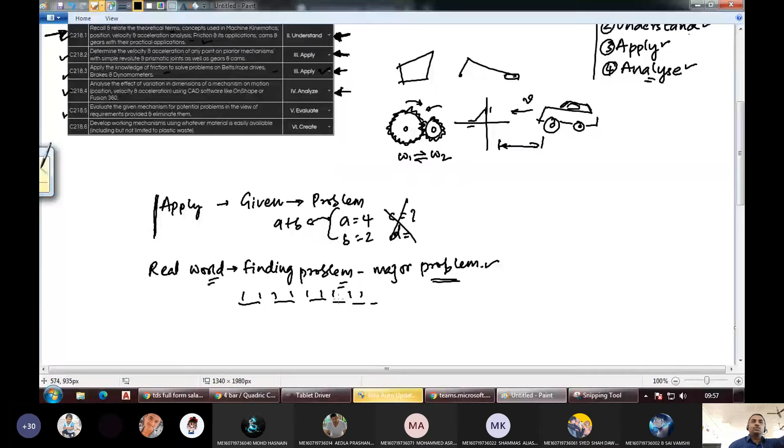So this is what is happening here. It's not just about solving a problem or remembering something. You have to analyze what is happening if we vary the length by certain value. So all these things you have to do in this fourth outcome, and that's why it is at the analyze level.

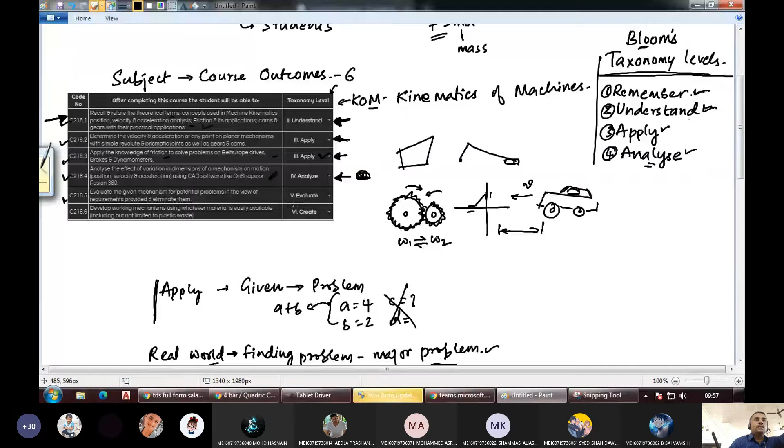Then the fifth outcome, you can see it's still higher, that is evaluate. This is the fifth outcome. So we have to evaluate the given mechanism for potential problems in view of requirements provided and eliminate them.

So let me say there is this problem of a 4-bar mechanism. Okay, so I want the wiper. Let me change the color, I'll take red color.

So let us say that I want the wiper to move from horizontal position here to the vertical position here. So this is the angle that it has to turn. So this is our problem.

So how will you solve it? You have to change the length of this crank, you have to change the length of this connecting rod, and you can change the length of this and this.

So all these lengths you can change, and the end result should be such that the rocker should be oscillating between these two positions.

Okay, so you don't just have to apply. You should know the formulae and how to find the velocity, how to find the positions, all that you should know.

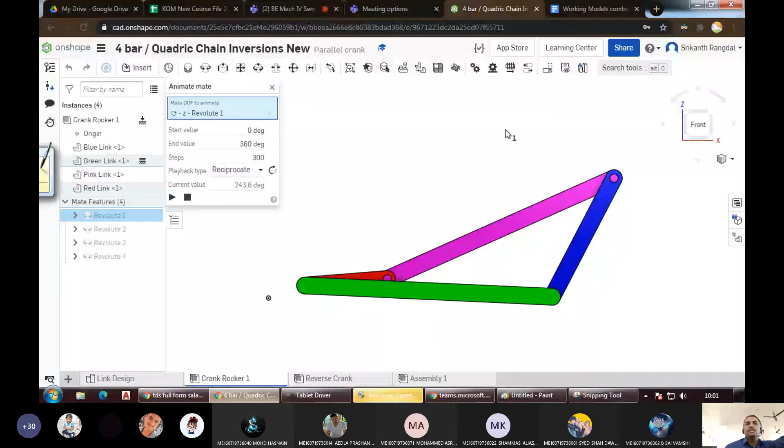And using these waste materials, we should be able to create mechanisms like this. We'll have to make holes in it, attach them in such a way that the mechanism can be obtained from it. Any doubts?

Someone was asking. Okay, so is it clear? Yes sir, so the last level here, okay.

So the sixth level, that is create. You can create only if all these skills are there with you. You should remember the formula, you should understand the formula, you should know how to apply it, you should have analyzing capability for that formula, you should be able to evaluate. Only after doing all these, only then you will be able to do creation.

A lot of us might not have thought in this particular direction. So this is a lot more systematic, isn't it?

Without following this systematic approach, also many of us are able to create some things. You must have already created, like you can do paper folding and make aeroplanes and other origami stuff. So for such simple tasks, we don't require to have full understanding of this systematic approach.

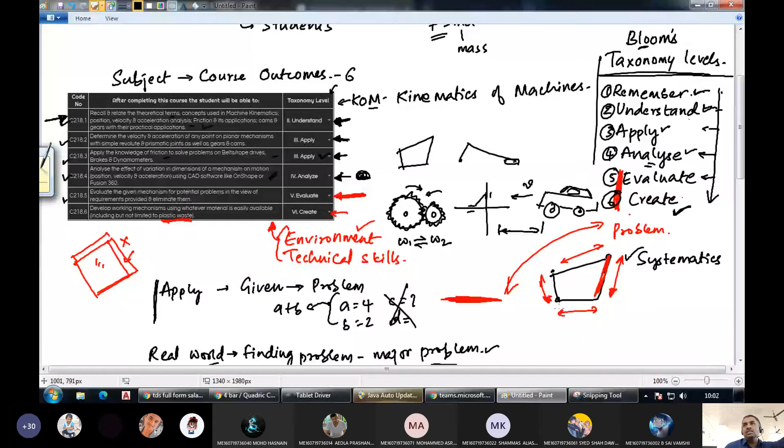But as an engineer, when you're doing the same thing, you should be able to document each and every step that we are doing. The same thing can be done by a layman and the same thing can be done by an engineer. So what is the difference between these two approaches?

A layman will do it based on his own understanding of the concept. He is not worried about whether some other person will be able to carry out the same procedure later. But the same thing when an engineer is doing, his focus should not just be on solving the problem, his focus should also be on the documentation process. Why is documentation necessary?

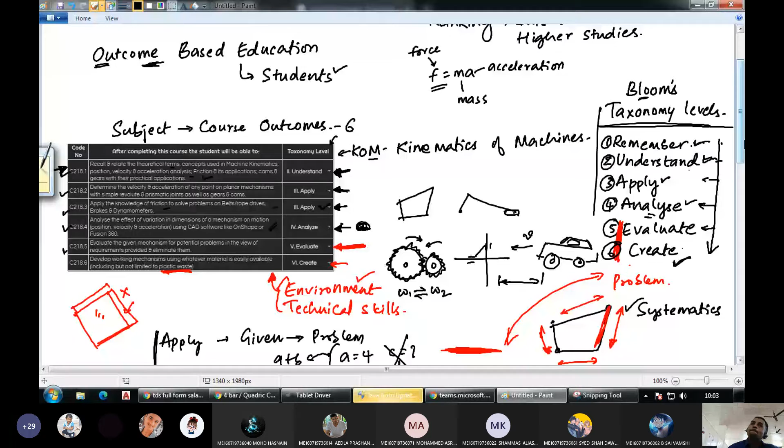Documentation is, yes ma'am? Like create the manuals for the people who will be using them. Okay, for other people who want to use that, who want to make the same stuff or mechanism, the other people should also be able to make it. And only then we can go to the industrial level and mass produce it, correct?

Yes sir, so this will not be possible from the layman. A layman will just have his own understanding, and if he tries to communicate his ideas, it becomes a major problem. He won't be able to communicate his ideas to the laborers, right? If it is a very simple component, maybe okay, he will be able to do.

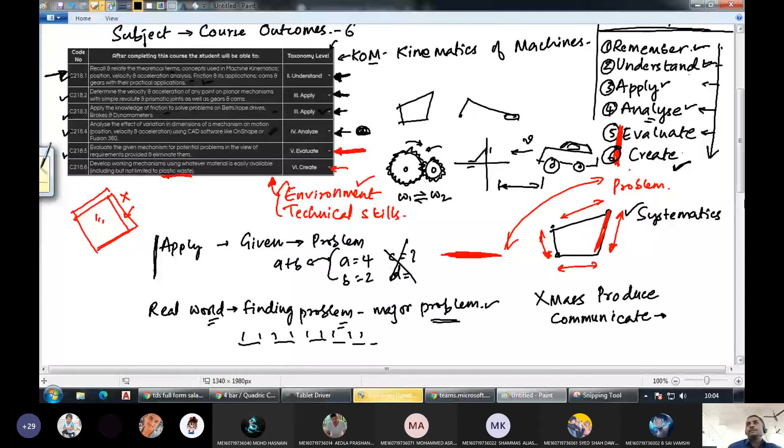But the complexity of the mechanisms goes on increasing. The more complex the mechanism, the more sophisticated it is, and the more complex type of problems it can solve, correct? And for such complex mechanisms, like if you take a simple automobile, for example.

So an automobile is made up of so many different things, right? In fact, there is no single industry which will take care of all the components of the automobile. There will be one industry which will completely focus on tires.

One industry will be completely focusing on, let us say, the suspension, windows and doors. Another will focus on the brakes. There will be another focusing on interior designing, the sofa set and what leather is used inside and other stuff. So there are different industries focusing on different stuff.

For such a complex entity, doing the documentation process becomes really very important. Because at a later stage, if you are coming across a problem and you want to rectify it, this documentation process will be very helpful. Okay, so someone was asking the question.

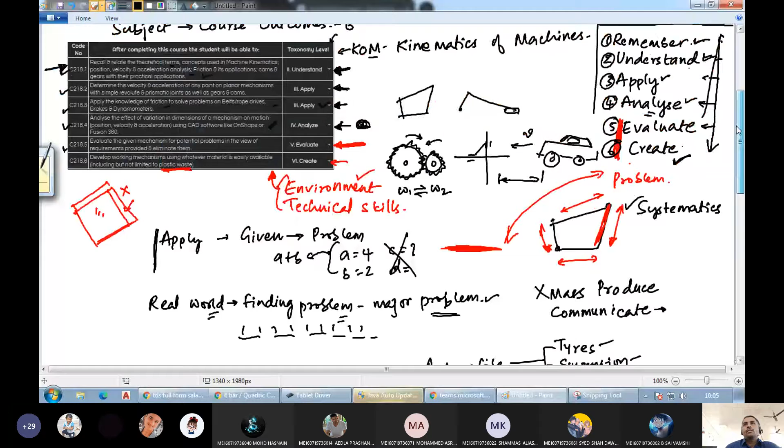Yes sir, so far we are discussing about automobile only. So is this topic limited to automobile only or anything else? No, this is kinematics of machines. Automobile is one of the machines. Because it is very complicated, that's why I brought it up.

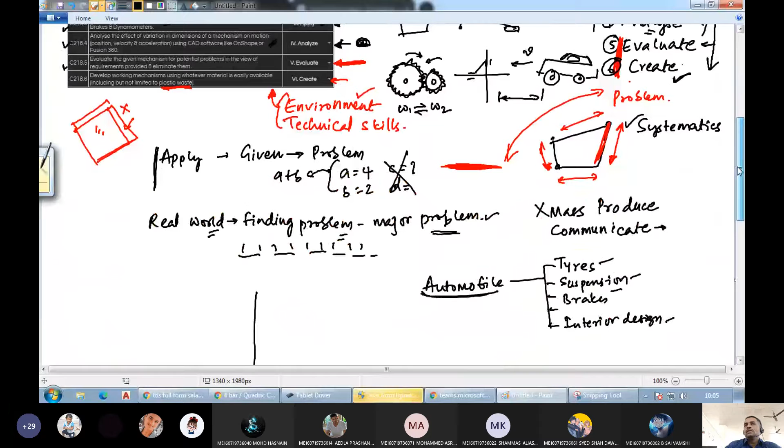So engine itself is very complicated, right? Engine has various stuff. So in this particular subject, we'll be studying about the kinematic part of the machines. What is the kinematic part? Anyone?

Dealing with kinetic energies or...? Kinetic is different and kinematics is different. Okay, let me explain what it is. So our family line, it starts with mechanics. Mechanics has two siblings, sons, let us say. So one son who is static and one daughter who is dynamic. Do you know what is the difference between statics and dynamics?

Anyone? Static means fixed position, at rest. Dynamics means moving body. Which is at rest and which is in motion?

So not just in motion, but changing the motion. If an object is moving at constant velocity,

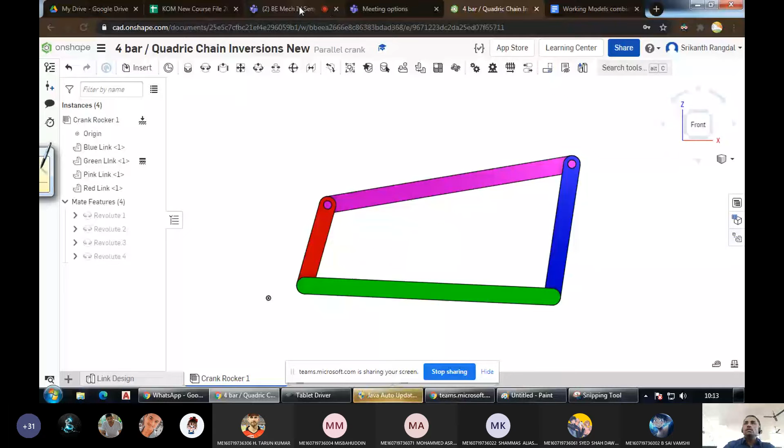So did you understand what is outcome-based education system and all? Hope there is no doubt with that.

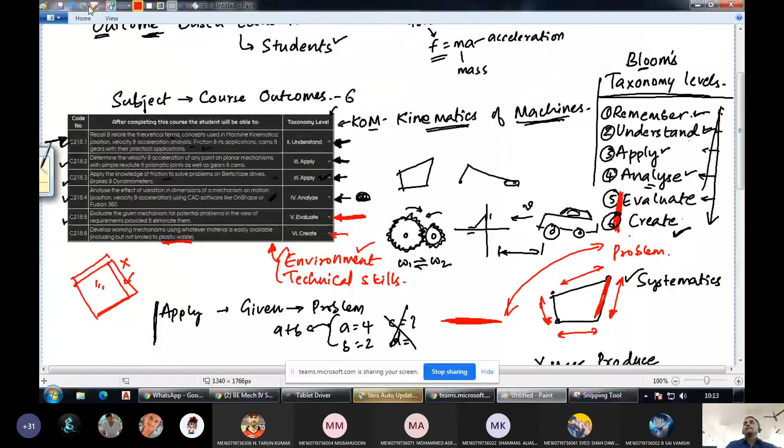Okay, so actually we can make all these outcomes at create level, but since you are doing BE, that is not required at that level. So only one CO I have kept at create level, and the remaining COs you can see below. One is understand, two are apply, one is analyze, and one evaluate. So all these skills we should be able to gain by the time we are done with this subject.

So when the NBA team visits, they may ask you what is CO number 2. If they ask CO number 2, you should be able to tell this. So at least a few students, 5 to 6 students - I think Durgesh sir must have identified some students, isn't it?

Hello, yes sir. Okay, so Durgesh sir said those few students. Yeah, so those students who were selected, handpicked by Durgesh sir.

So those students, it's my suggestion to please learn by heart these COs, at least for 1-2 days when the team visits. Of course, it doesn't matter if you remember it beyond that also. If I'm ignoring a particular CO, you can always remind me, and I'll go back and try to give you that skill anytime. But the NBA team may ask a particular CO out of this.

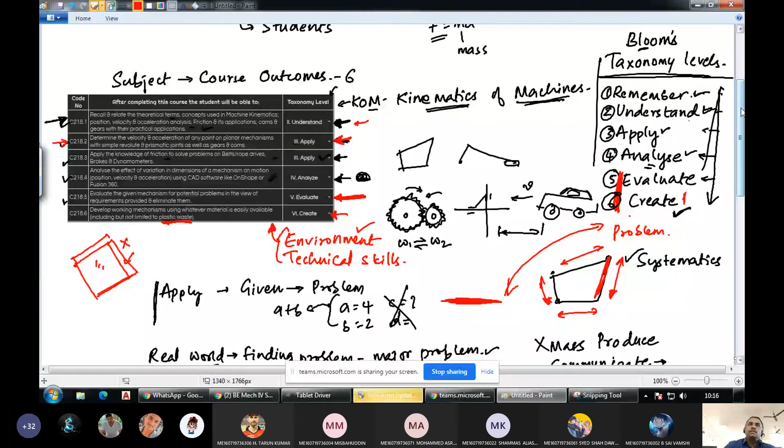And a good part of today's class I have spent explaining to you what it is and what each of these COs mean. So I hope there won't be much problem for you while explaining to them how this works, right?

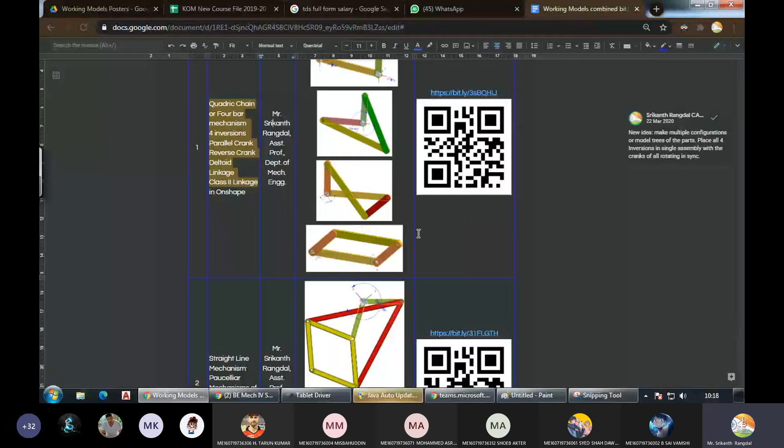And this is where you can see the links are starting. So here, this is the title, and who prepared it. There are some pictures, photos showing what is available in that file. So you can see the first file is completely on 4-bar mechanisms. So we can just go here, click on this link and open it.

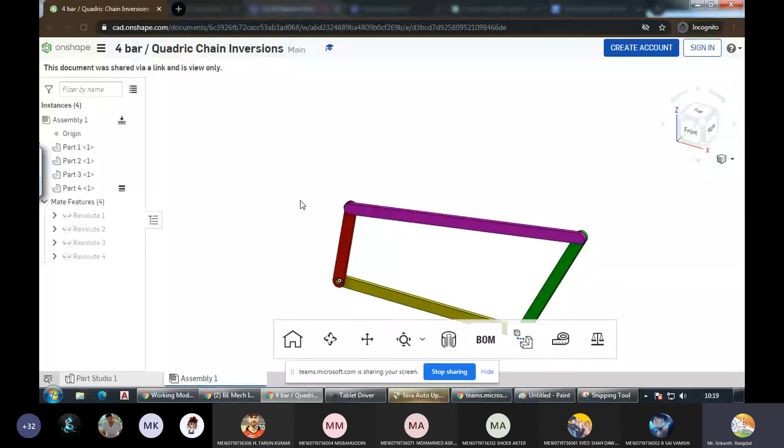Fine, so I'll just open in incognito mode because I'm signed in here. So if I'm opening in this particular window itself, instead of incognito, I will get all the options to edit. Whereas this is how it will be visible to you all, right? So you will not be able to edit much.

You will just get the option to zoom. Okay, and in assembly, if you see, you will have the option to animate it. So you just have to right click on this, click on animate, and you can click on the play button. It will start showing you the animation. Is it visible?

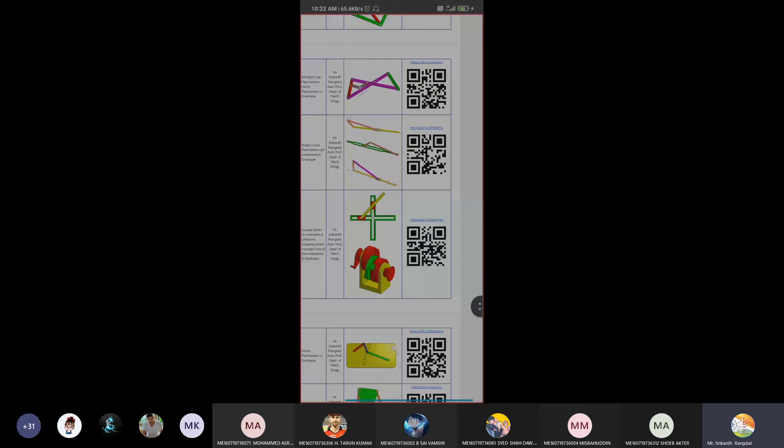So you can see I've jumped onto that place and I can start browsing the different mechanisms. A total of 9 different files are available, and in each file there are different mechanisms - not just different mechanisms, but different configurations of the same mechanisms are also present in some of these files.

So you can just go through these files. I have tried to make the subject as enjoyable as possible, because according to me, when I was studying engineering myself...

A lot of my friends used to face problems understanding how the mechanism moves, because the textbook will just give you a static image. It won't show you by animating the mechanism how it actually moves, and that made this particular subject very challenging. It used to become very difficult for my friends to imagine what motion occurs and how it occurs.

That was always some kind of regret in my mind. And when I started teaching, I didn't want my own students to face the similar problem. And that is why I've created all these models.

I hope you make the best use of these models, and I hope you will not face the difficulties which we came through in our time. So, anything else?

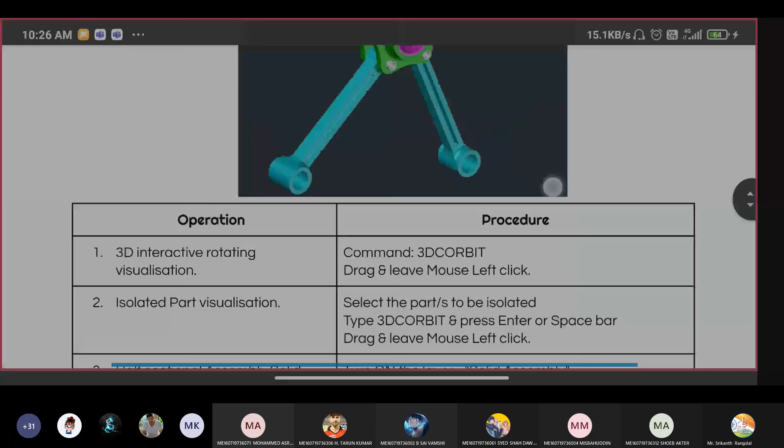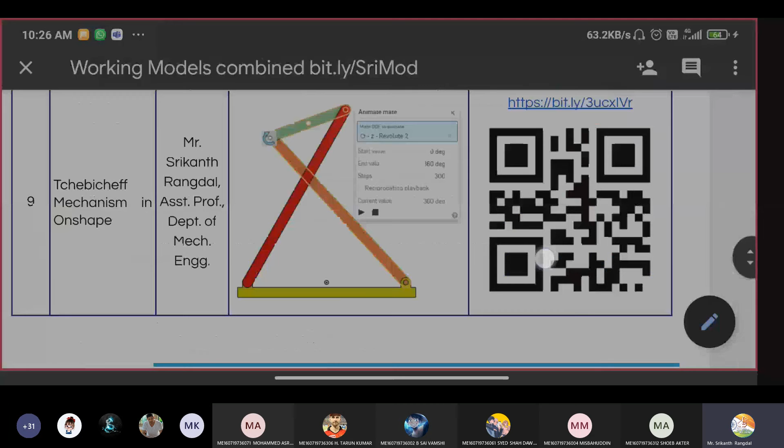Scanning the barcode with Google Lens will also work. So if you have two mobiles, you can open it on one mobile, scan it with Google Lens on another. But I don't think that is required, because just above the barcode there is this link - you can see bit.ly/ there is some code.

Isn't there any way for jumping directly to that file? Yeah, you can just tap on this link. Tap on the link, scrolling down to get to that point. Yes, you can just open that link using browser. So now it is showing me options, right? So I can open with Chrome. So choose Chrome.

What is the name for that file, sir? What do you mean, name for the file? Like this model name - model name is given on the left now. So what is that name? So which model you're opening, it depends on that, right? I want to open the model that is presented, Four bar on your screen, sir. Four bar, yeah. It is called quadric chain mechanism.

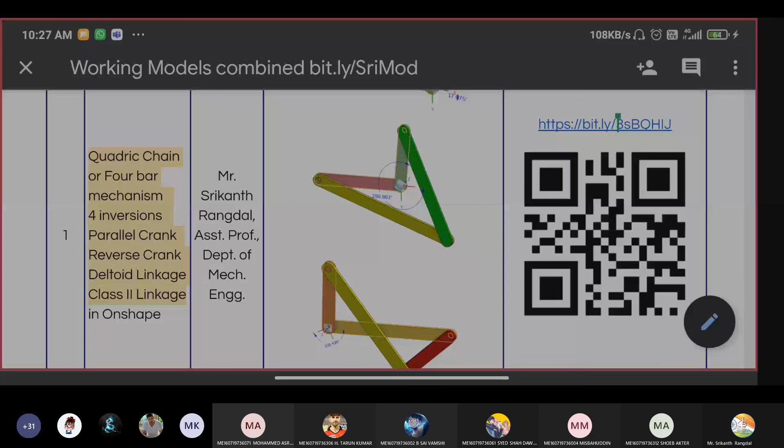Some images are also there, no? Yes, sir. So scroll to the top, this one. No, I'm scrolling down to find that. So instead, the first one is quadric chain or 4-bar mechanism. The 4 inversions are also present along with the different configurations. So this is the link.

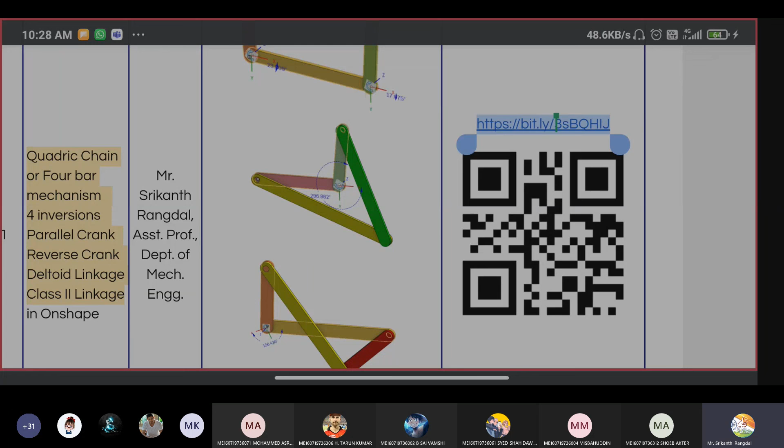Okay, this is the link which you have to open. Just tap on that link, and it will ask you - it will give you some option. If you are using mobile it will give some option. So I'll just open with Chrome.

When I'm opening with Chrome, once again, if Onshape is installed on the system, it will again give the option for Onshape. Then you can tap on the Onshape option and it will open in the app. So Onshape doesn't work in landscape, it will be in portrait mode.

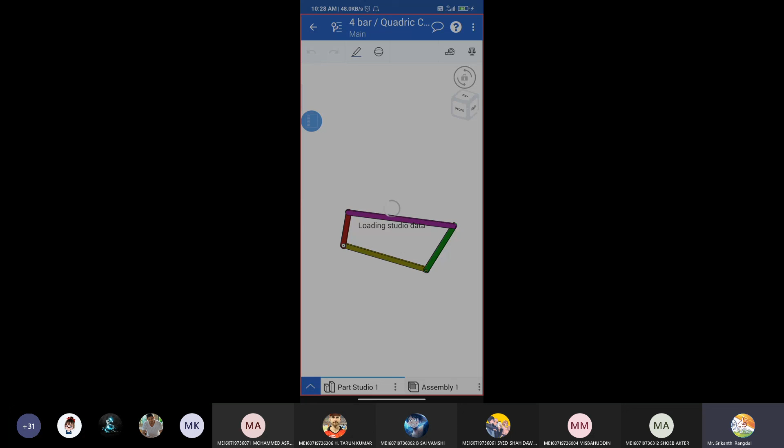So to change the dimensions, you should go to Part Studio. But I don't think with this link you will be able to change the dimensions. If you want to change the dimensions, all of you will have to create an account in Onshape, and later on I will create a Google form and collect all your mail IDs. After collecting the mail IDs, each mechanism, as and when we are studying about it, I will share that mechanism to all those mail IDs you have created. So when I'm sharing it this way, you will be able to make changes to dimensions also.

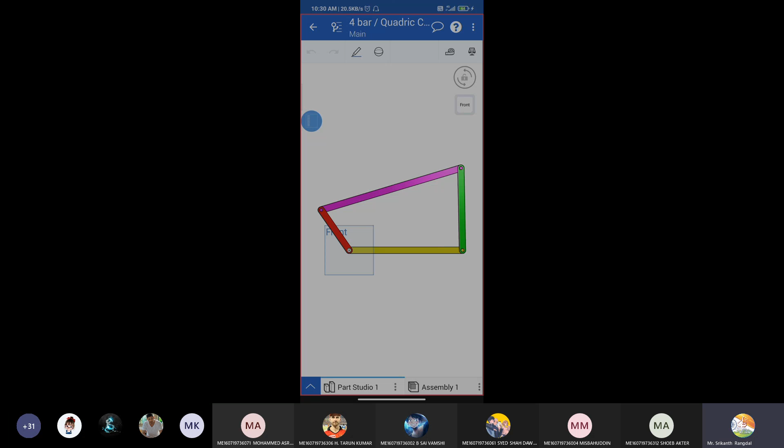You can see your screen, sir? Okay, the mobile screen is shared right now. One minute, anyway let's discuss this in next class. Time is almost up.